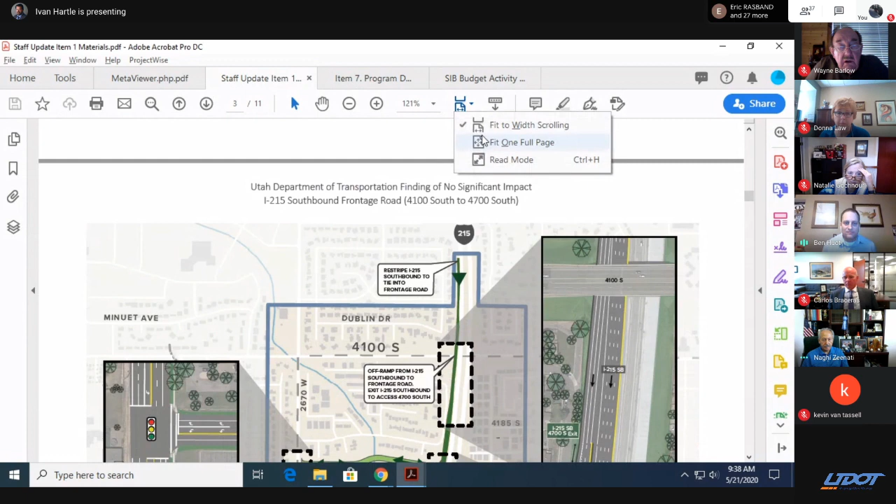Ivan, if you'll scroll down, the first project was the I-215 Frontage Road project. There was a comment on that one by Senator Harper at the previous commission meeting. If you scroll down one more page, this is a map - let me figure out the best way to show that. Anyone from Region 2, feel free to jump in at any point as I go through these descriptions. This is a project that consists of a revision to the exit ramp on southbound I-215 to 4700 South, which includes some local road connections to 2700 West, as shown on this map. This figure is actually from the environmental document, so this project does have an approved environmental document.

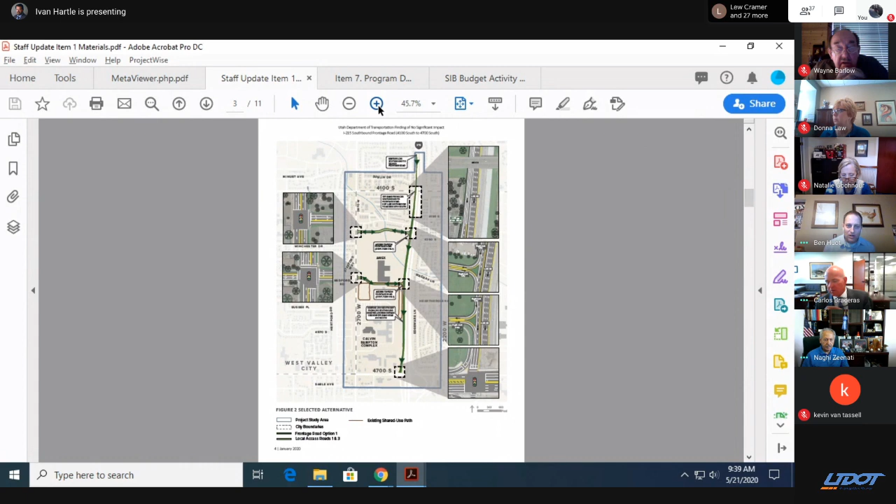Ben, would you have Ivan kind of locate people, show where the complex is, where the new state office building is, just do some orientation of the roads? Yeah, that's good - this one's a good location because a lot of us are very familiar with it. So there you can see the Calvin Rampton complex right there, and then the American Express building just a little ways to the north there.

Okay. So this just gives a general schematic of how the project consists of.

There's been, I believe it was in the public comment also, an opportunity at whatever future time this project goes forward to do this project in pieces if need be, with the local road connections versus the freeway facilities or ramp facilities. I believe that's how it was mentioned before. So is there any questions on location or what the project consists of, or any additional comments anyone from Region 2 wants to make on just the general location of the project before we talk a little bit about the ranking and some other factors?

Just a quick comment, Ben. This is Bryan. If you look at the cost estimate, we've been working with Taylorsville City on completing the environmental document and pricing this out. The number was 20 million total. Technically, 15 million of the 20 is to do the frontage road or the ramps. The remaining 5 million are all the cost associated with connecting those side roads to the frontage road. Just wanted to clarify there.

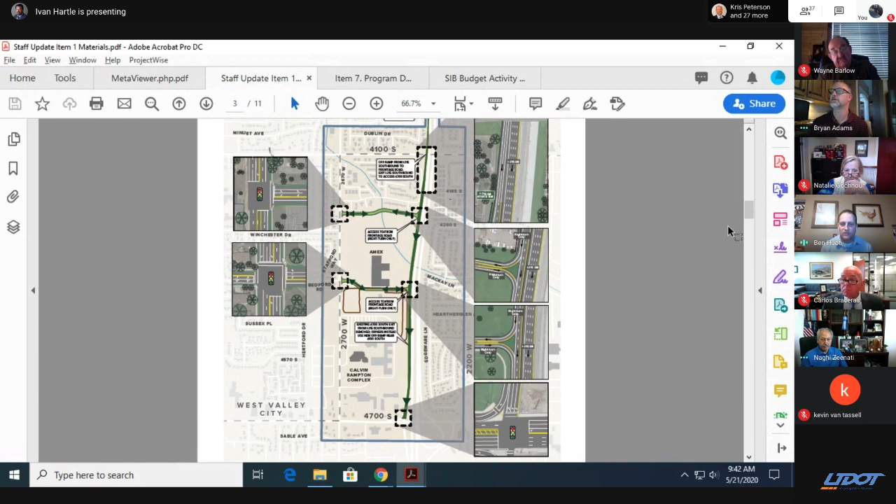Perfect. So if there's no other questions, we can always come back to the map if anybody wants to discuss this one more. So if you scroll down to the next page, the intent of this was just to tie this back to what we've been working on in the prioritization process. It's very small, but this one was ranked number 41 on that prioritization list. I just wanted to orient everybody to where this project was on the list.

And then if you scroll down, well, I guess the last piece of that was just what Bryan mentioned. The cost estimate was shown there, and then he did clarify that there is a split in how that cost estimate is broken up on the project.

And I guess the last thing I'd want to mention is the reason it is not included on the recommendations for the TIF highway project on the UDOT list is, we talked about this last month, when we developed the considerations and those recommendations, we had already had the TIF highway program. It was programmed out through 2024 and partway into 2025. Given some of the uncertainty with how the funding was, the recommendations included some early environmental work on 2 projects and did not include any construction project recommendations at this time, knowing those would be available in future cycles. Given that we were programmed out through 2024 into 2025, it wouldn't be an immediate delay, if you will, on those projects.

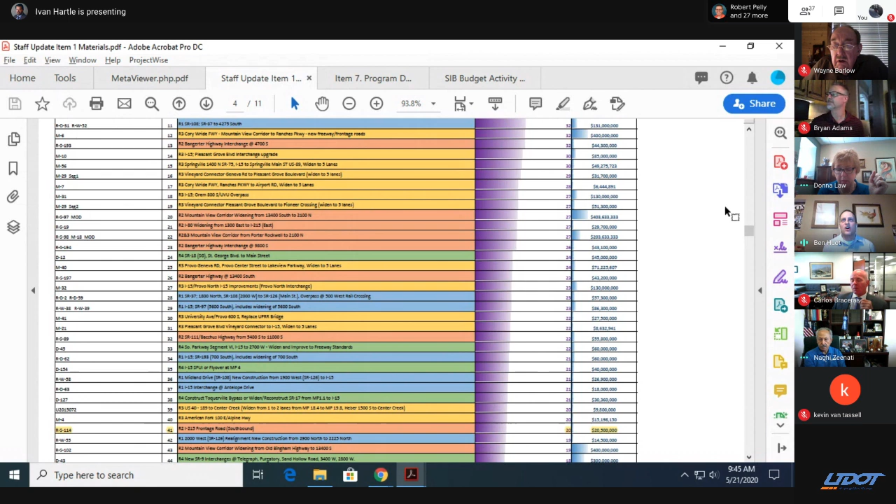On the prioritization process, that's a good comment. I don't know for sure if the models, some of the travel demand models, would have been able to catch up with that specific change that quickly. But that's a really good comment, and probably something we can definitely dig into for this next go around and clarify that.

Okay, thank you. I know part of what the commission is supposed to do is help make sure we're using the data, but things may happen between the time the data is presented and our conversation today. I think those things need to be considered and weighed, given the amount of people now that will be using that—state people, you'll have neighbors. I think it's awesome.

Maybe if I could just add one comment to that: the American Express building did have people in it previously, and it functions fine, so I think it's just a change to having the state campus there, but there were people working in that facility previously, so it's not an addition of people. There were people working there before.

And maybe just to clarify, for those of us who have worked in areas where a new temple is coming in, there's usually a big crush at the beginning, but that usually stabilizes over time, and it does not add a big traffic flow, depending on the area. It's usually not a huge percentage increase in traffic. It's that initial crush we usually end up planning for as it opens in that first couple of months, but past that, it has a tendency to level out. So just a little bit of perspective—those are two big things happening, the state campus and the temple, but I think a little perspective on the traffic impacts is helpful.

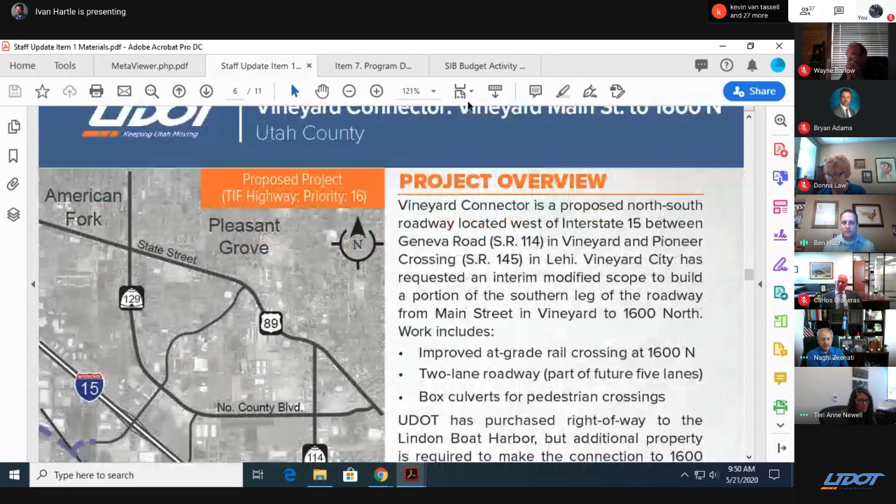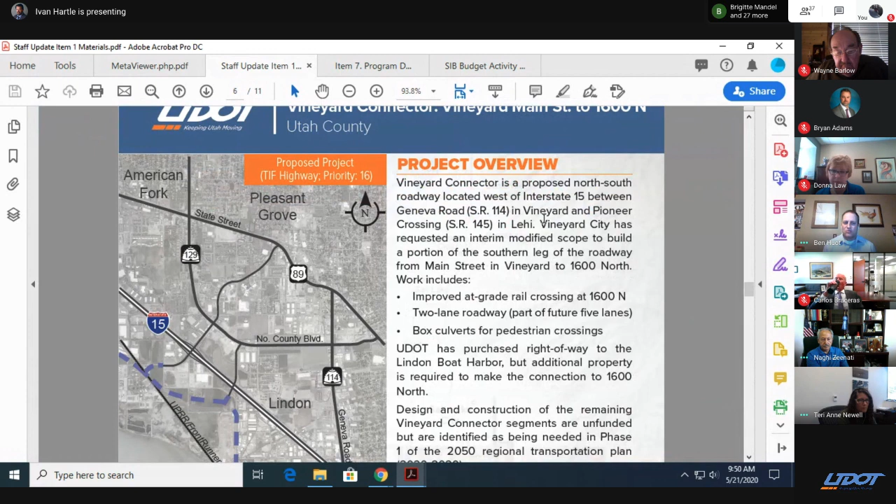So if you scroll down, there's a fact sheet. This is part of some of the materials that the regions put together as they have projects that are on the ranked list as needed. I just want to note on this one, and if Region 3 wants to jump in to correct me, the public comment that the mayor provided was a modified scope from the project that's actually shown in the prioritization process. So it was a little bit slightly different than what was shown there. I believe it was a shortened version of that project, and this fact sheet represents that.

That's right, Ben. The project shown on the map, the dotted line that goes to the interchange just below the I-15 shield, that's the Pleasant Grove Boulevard interchange. The project that was ranked number 16 would take you from the beginning of the dark blue line at the bottom on SR 52, all the way up to the interchange at Pleasant Grove Boulevard. The original project, that full segment, was prioritized at a cost of $116 million. The project that Mayor Fullmer described at the last meeting is shown in dark blue there, going to 1600 North, which is probably just shy of halfway of the original project. That's much cheaper because we've already cleared most of the right of way, and there's no structures involved. So that project has a construction estimate of $15 million.

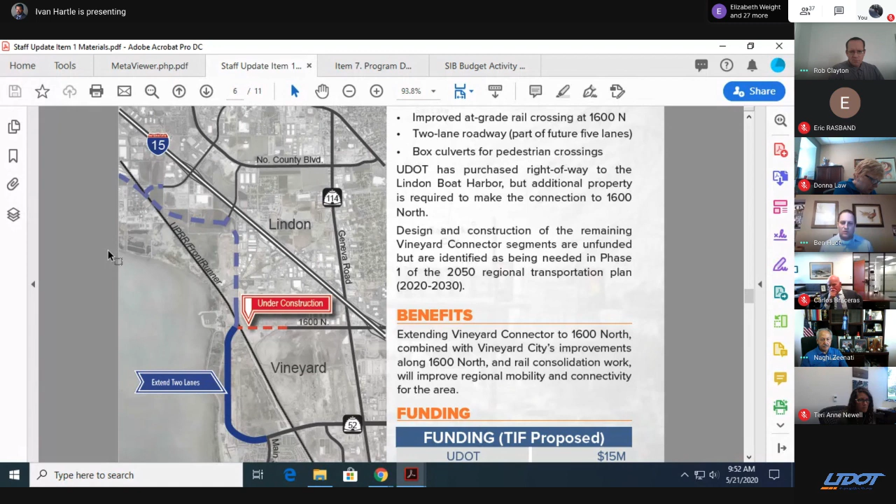Are there any questions on the project details or the location before I show the ranking page again on this one?

Ben, Lew Cramer here. So good to be heard, maybe. I didn't even know we had a Lindon Marina. Do we actually have boats there? Carlos is the sailor in the group, but I had no idea about the boat harbor.

Yeah, this is Jim. We do have a Lindon Marina. I've launched my boat there a number of times. It's just right there to the north of Vineyard. And there's traffic as a result of all that, Jim? Yeah, it comes down 2000 North or 1600 North from both directions to get to that, so there is traffic there. It's used more and more as the growth has happened out in that part of the county.

Yeah, it's a private marina. Yep, it is, and they still have the state - they're doing the mussel invasion, washing and stuff like that. But it's kind of a private marina. The state has that station there to spray the boats down.

Excellent. Well, I was at Vineyard yesterday. The growth there is phenomenal, and I absolutely support this. I think that's needed so much to ensure there's some balance in that part of Utah County. So thank you.

And I think, so maybe just as I mentioned - go ahead, Rob. I think from the mayor's perspective, from talking to her, I understand where they're coming from. They see this plan on our plan for the Vineyard Connector and the long range plan in phase 1, and they've been implementing the development of their city to be consistent with the Vineyard Connector, trying to time things with this improvement. I think that's what you heard as urgency in her voice - that's related to trying to marry our plan with their plan, and the timing of it.

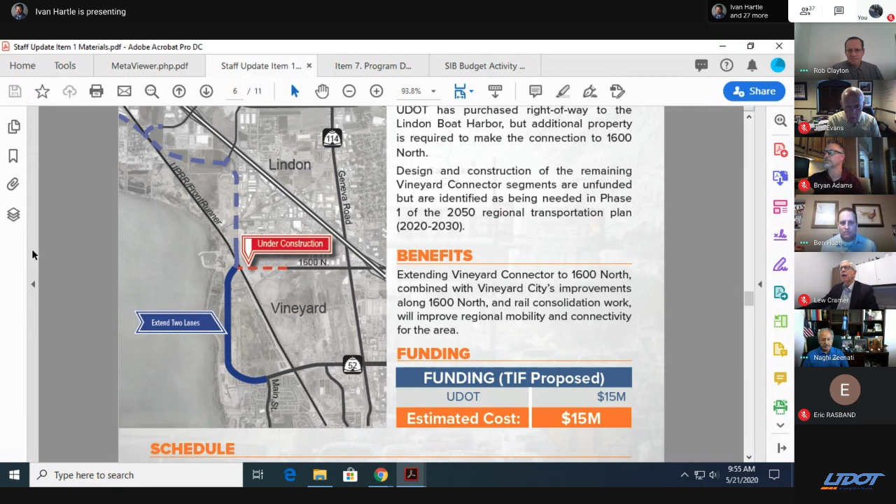So Ivan, if you'll scroll down a little bit, we just included the ranked list again to highlight. And like I mentioned, I did caveat this one - the project that received public comment was a modified version, or a portion of this ranked project.

Just to repeat that the Vineyard Connector - the reason why that is not included in our recommendations is it does have an environmental document, and we're programmed out through 2024 and into 2025, and we did not include recommendations for construction projects at this time.

Is there any additional questions that we can answer, or anything on that project?

I will note one thing before we move on to the next project, which is in the Transit Investment Fund - we did receive comments, multiple comments, on the Provo Trail in the TIF active category, the Provo Canyon Trail. But that one is included in the recommended funded list, so we weren't planning on going through it in detail today unless there's additional comments we need to talk about.

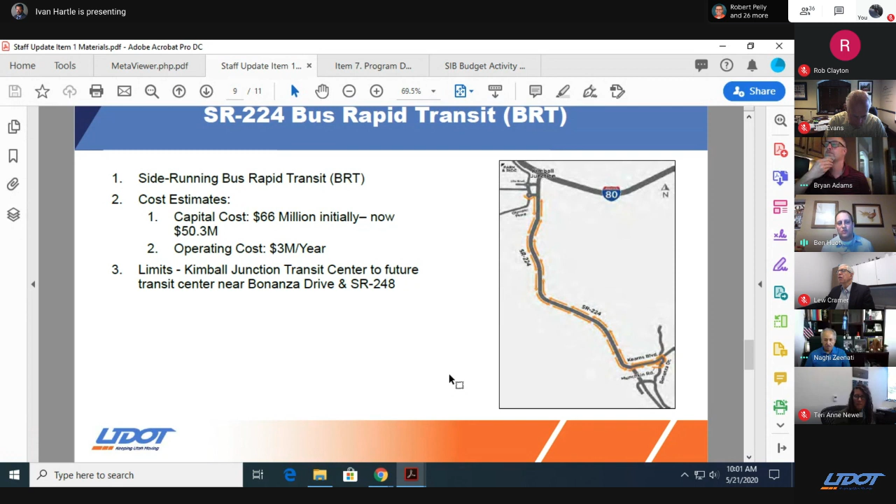Okay. Well, and I guess one thing I could, if you scroll down to the next slide, yeah, this one with the ranking, I'll give just, this was the project that was not included in our recommendations. And one of the reasons for that is that with the TTIF transit program, we targeted programming out into the 2022 year on that revenue. And one of the limiting factors with this one was the large amount of money on the request from the fund. You'll see there the 39 million, which is the TTIF portion, not including a match portion on this project.

So that was one of the considerations I mentioned on the TTIF funding recommendations. With the TTIF, we didn't have any programmed projects on this one. So in developing the recommendations, some of the considerations we took into effect were: this is the first time on this program, the input list or project list relied on nominations from local governments or districts, and we had a short time frame. So we didn't want to program or recommend funding too many years out. But since it was a new program, we felt the 2022 time frame was a good target for how far to program out at this time. And so given those revenue projections in the 2020 to 2022 time frame, that was the pool of available money to work with.

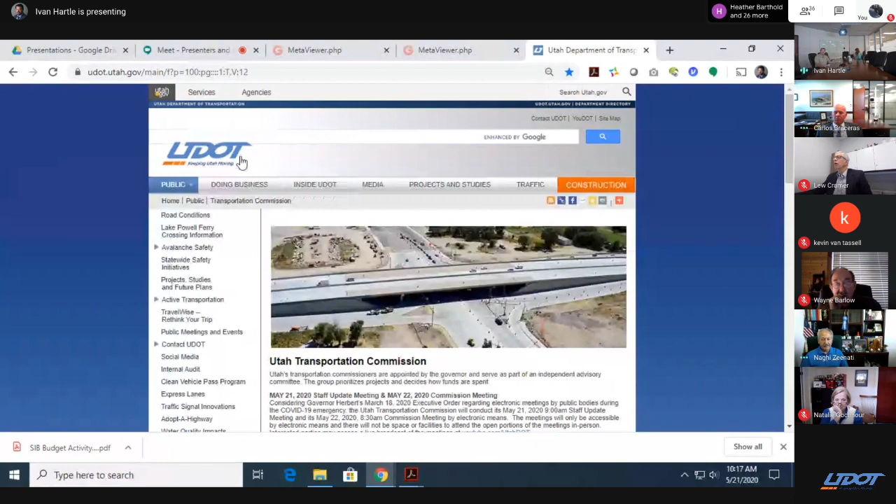The easy one would be if I navigate back to the transportation page. Under our UDOT homepage, under the Transportation Commission, if you are looking for the list of projects or the programs we've talked about, if you want to see what's going to be presented, here are the proposed projects and the information that Heather has provided, or under meetings, agendas, and audio.

Heather has our agenda meetings posted here, and there are also links into our items. Under program development, you'll see our Transportation Solutions Project, the TIF and TTIF projects, and this link that will launch the materials of what's being produced. This is just that packet, and it goes several pages down through all of our other actions. But here's our list that we'll be presenting tomorrow at the commission.

Just a point of clarification, Ivan or whoever—as we look at the transportation solutions, that is different from all the others. This is not a prioritized list, it's just an inclusive list, right? Correct.

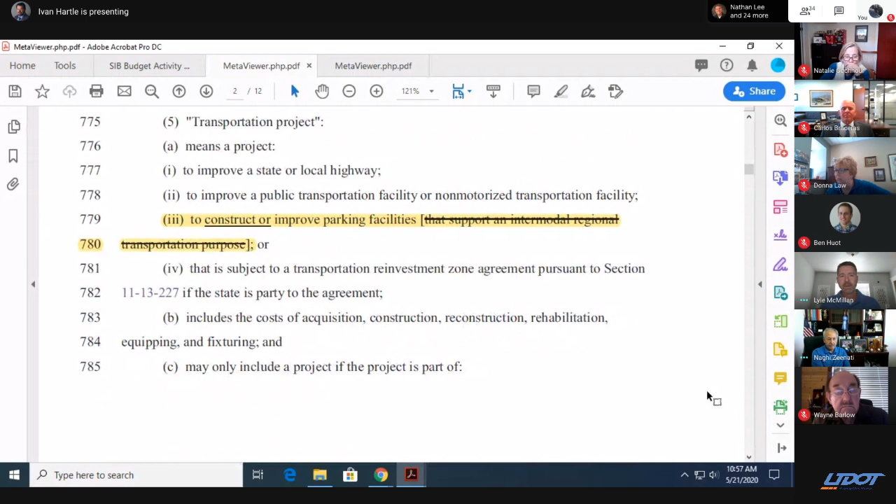So this is in your materials. I just provided a reference to the actual bill that was passed and highlighted the areas that I just identified in the bullet points. You can keep going down, Ivan. So that's for your reference, just so you can see where it happened and confirm that the language is there. And then we'll go to the actual proposed rule.

We've had an existing rule for quite some time now, and this rule basically brings into effect the prioritization process and increases the term from 10 to 15 years. Originally it was fairly long. We met every week for months. And what you see is a very simple, concise rule. The amount of time that we invested in this does not reflect how easy it's going to look, let's put it that way. Ben has a nice way of putting it that I don't remember how to say.

So the rule basically, we start - one other thing I wanted to identify is that I've been in front of the commission about a dozen times over the last 20 years with rule review. There's 2 kinds of rules. There's the UDOT rules that we bring in front of the commission for your review, and inevitably one of you asks, are we supposed to do anything with this? The answer is no, we're just supposed to bring it for your review. But this is actually a Transportation Commission rule - this is your rule that we're proposing you adopt so we can help with the State Infrastructure Bank funding and prioritization. So this is for your review and hopefully your approval to move forward.

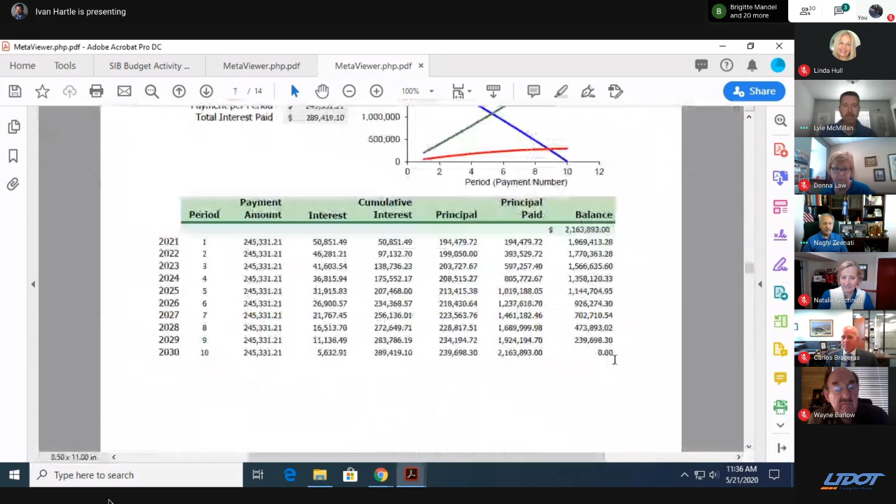Okay, so once again, Midvale has two projects. The project that they came to you with last year was up by the Bingham Junction TRAX station and was part of the CHG healthcare campus.

Basically, they're putting, and in fact, if you can go down to the map for me, Ivan, just so that I can help orient everybody to the geography. I put on there that, can you increase the zoom? A little more, please.

There we go. So that star, the red star, is where the parking structure is going. And that will basically, right now, that's flat parking. The parking structure will go in and enable a vertical office structure for CHG to expand and bring more jobs into that area. And that was what they came to you and asked for last year.

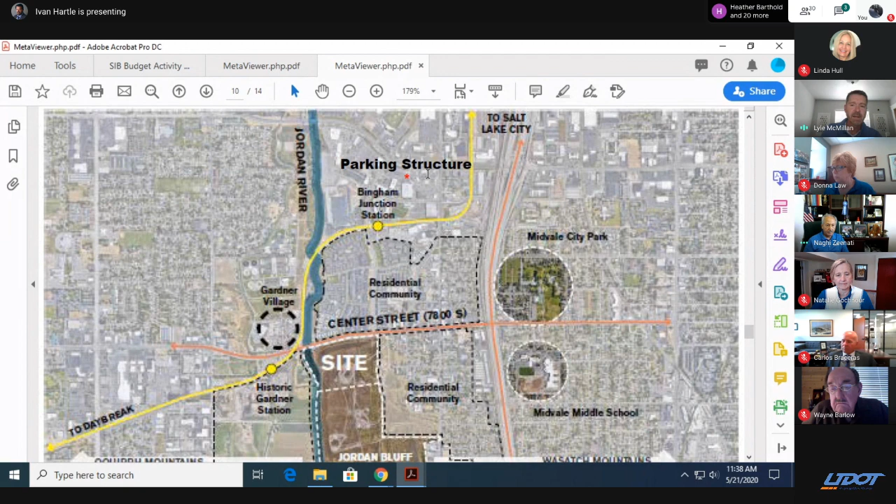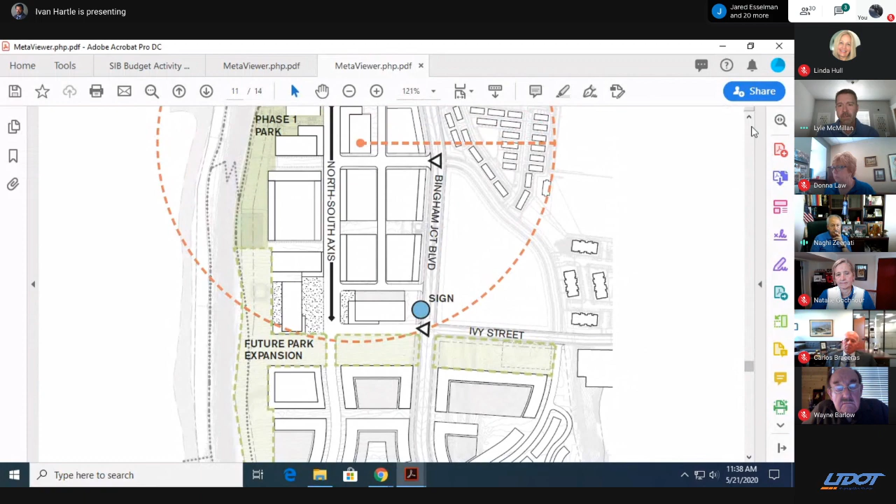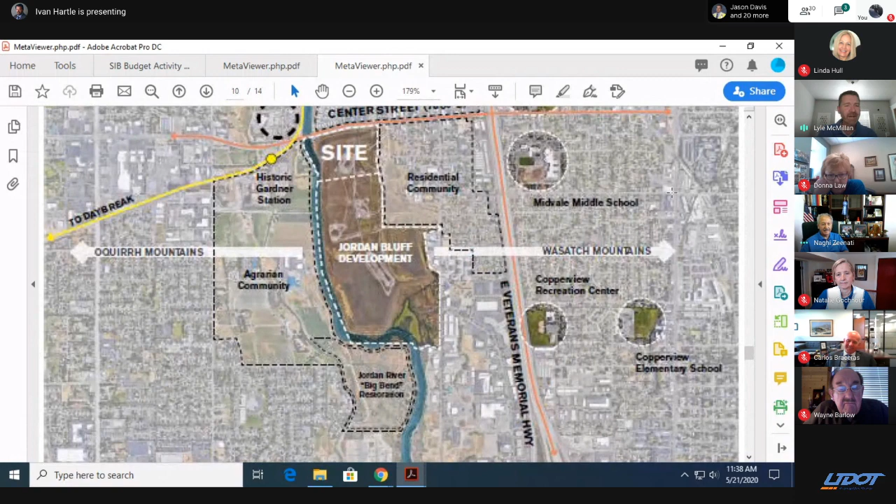And now further south on the other side of Center Street, near the historic Gardner Station. If you could just go to the next page for me, Ivan. So you see there that Jordan Bluff development. Go up a tiny bit. They're putting it. You can do it, Ivan. I believe in you.

Down one more page, please. There we go. And you can see there's a significant Gardner, Zions, Midvale City, all collaborating on a pretty significant development there. And that parking garage is integral to providing additional office space for them in terms of construction, bringing jobs, economic development, the whole 9 yards.

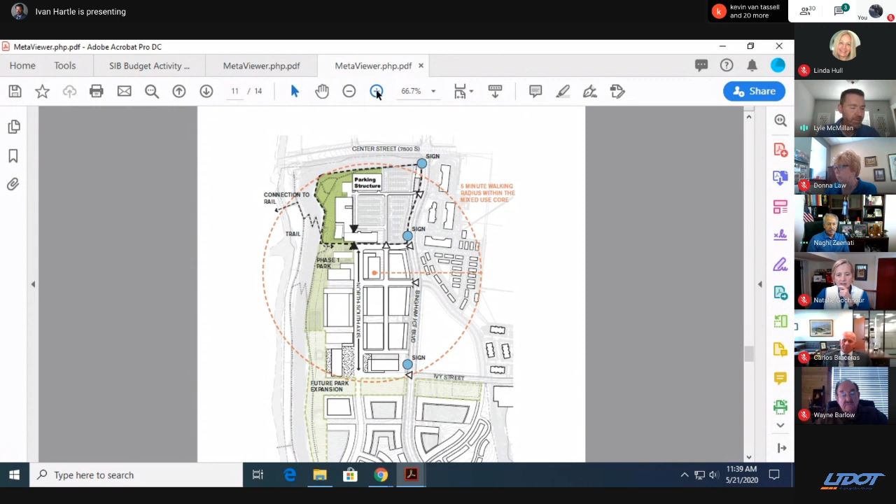This would score, based on the criteria, fairly well if that were in place. So if we can go back up now, Ivan, to the fact sheet.

All right, so as we noted earlier, the 2020 legislature amended the SIB statute to provide more flexibility regarding parking structures, economic development initiatives, and projects that provide benefits to political subdivisions, which these projects do. This second project that I just showed you, they expect to be a job creator. And the city has identified and submitted an application for $5.5 million for this project, and they propose to use RDA revenues to repay the loan.

And they anticipate this project to be complete within the next 2 years, which is when they would start the repayment. The interest rate is 2.65%, which is 2.15% AAA municipal general obligation bond plus the statutorily provided 0.5%. And if you're comfortable, the city is also requesting a motion that you provide them with the contingent approval to convert to the 15-year term when the new SIB rule that we talked about a couple minutes ago becomes effective.